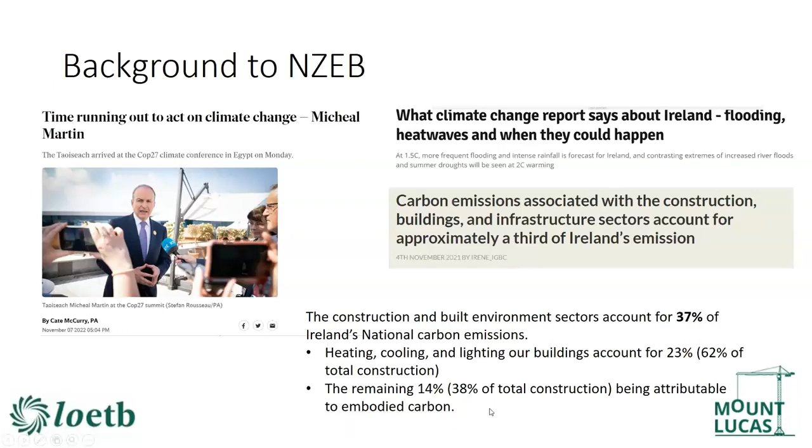If we look at that in statistics, the construction and built environment sectors account for 37% of Ireland's national carbon emissions. And that conversation is happening across the board. How are we reducing carbon emissions in our transport sector, in our agricultural sector? But we also need to look at the built environment sector as well. If we break that down even further, our heating, cooling and lighting in our buildings account for approximately 23% of that. And then the remaining 14% is embodied carbon. That conversation is starting to become more prevalent now, and you'll hear more about that in the future.

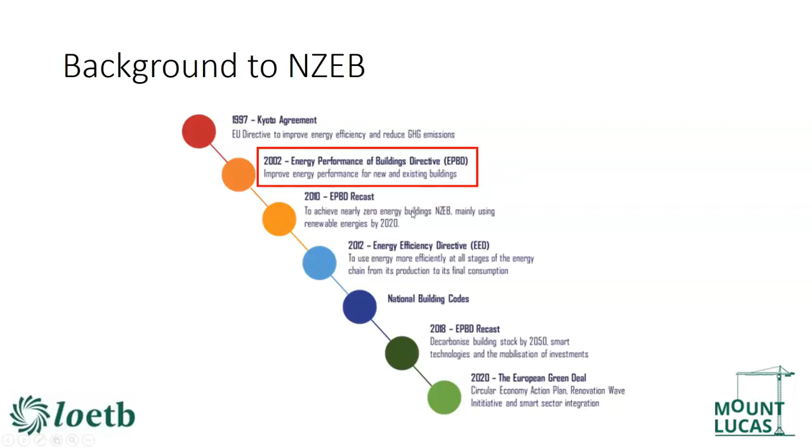So where did NZEB come from, or what's the background on it? Essentially, it's all coming from the Energy Performance of Buildings Directive, which is a European directive originally published in 2002. It was recast in 2010, and then recast again in 2018. Essentially, we're hoping to reduce our CO2 emissions by 51% by 2030. Like I've already said, we need to focus on the built environment. We need to aim to reach carbon neutrality by 2050 in order to slow down or stop climate change. We're all very aware that we're experiencing these incredible weather conditions at the minute.

I was helping my brothers build a shed at the weekend, and I went equipped for November farming, 2 pairs of trousers, 2 hoodies, and I was peeled down to my t-shirt in a matter of minutes because it was so warm, 17 degrees on a Saturday in November.

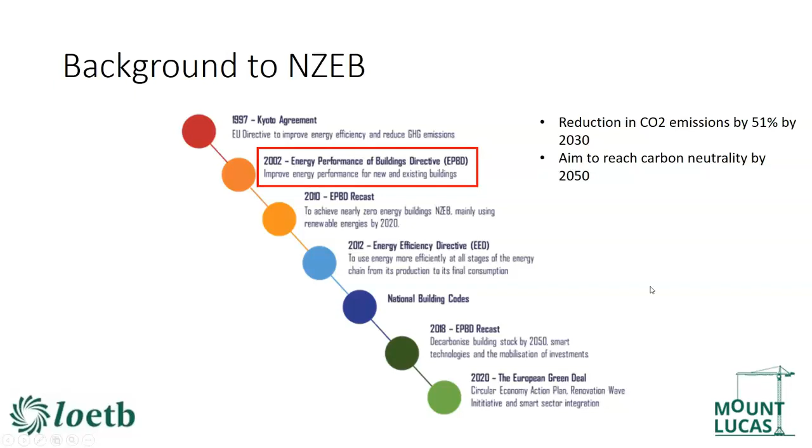We're all very worried about what's happening with regards to climate. So essentially, we now need to take more responsibility to slow down or stop climate change. We're focusing on the transport sector and the agriculture sector; we also need to focus on the construction sector. So the Energy Performance of Buildings Directive is a European legislation. It was pushed out to all of the individual member states, and NZEB started being mentioned in the 2010 recast. Each member state was given its own ownership on NZEB, and Ireland published these 2 documents in 2019.

So Part L, Technical Guidance Document L, and Technical Guidance Document F were both published hand in hand in 2019, and this is essentially where NZEB comes from. So it's the conservation of fuel and energy in dwellings. And in tandem with that, we need to have an understanding of the ventilation regulations. As I said, they were both originally published in 2019. TGD L has since been revised in 2022. Both documents must be looked at together in order to meet NZEB compliance.

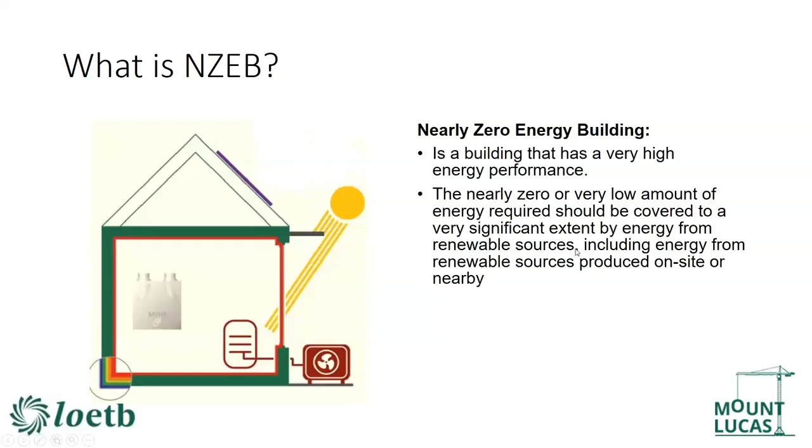So what is actually NZEB, and what does that mean for us? We have this schematic here at Mount Lucas. It's considered to be the 7 steps to NZEB, and I'm going to use that as my basis for this lesson today. A nearly zero energy building is a building that has a very high energy performance. The nearly zero or very low amount of energy required should be covered to a very significant extent by energy from renewable sources, including energy from renewable sources produced on site or nearby. And that's coming from the EPBD.

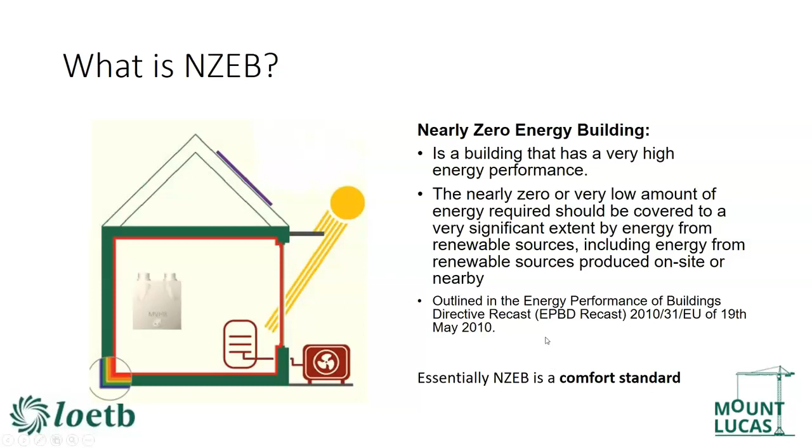Essentially, it's a comfort standard. So we're trying to build a highly insulated, highly airtight, well-ventilated home that costs very little to run and burns very little carbon. And then we're going to also produce renewable energies on site or nearby. That's what NZEB is in a nutshell. But ideally, we're going to have high levels of comfort in an NZEB dwelling.

So the three key targets for NZEB in an Irish context are to reduce the energy performance. And when we're doing that, we're comparing it to the existing housing stock. Most of us live in C-rated homes, D-rated homes, E-rated homes, or even Gs. And we measure those homes using the BER assessment tool or the DEAP software. So we want to reduce our energy performance coefficient, that EPC figure, and our NZEB dwellings should have an EPC of 0.3. That's when compared to the 2005 building regulations.

We also want to reduce our carbon consumption dramatically. So our carbon performance coefficient, or our CPC value, should be at 0.35. So we're going to consume less electricity, we're going to reduce our carbon consumption, and then finally we're going to have renewable energies in our houses. So we must have a renewable energy ratio, or an RER, of 20% on all NZEB dwellings in order to comply with NZEB. And that's coming straight from Part L of the building regulations. You'll find EPC, CPC, and RER littered throughout that document.

I just took some snapshots there of the BER in case you weren't familiar with the rating system. So it rates houses from A to G. And like I said, it's measured using the BER software, which is called DEAP, the Dwelling Energy Assessment Procedure.

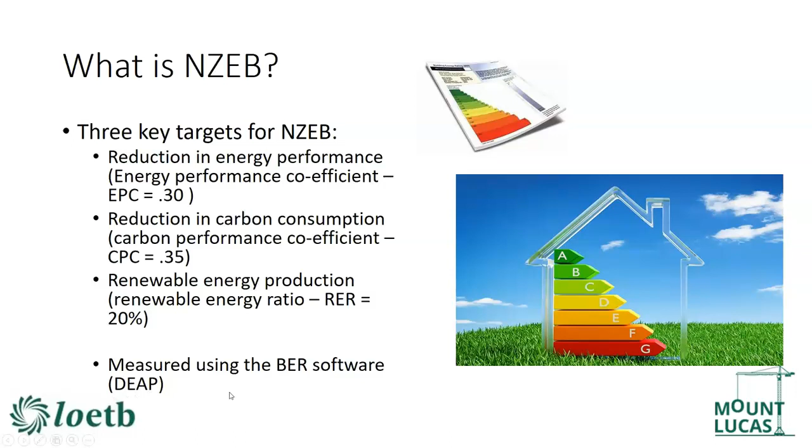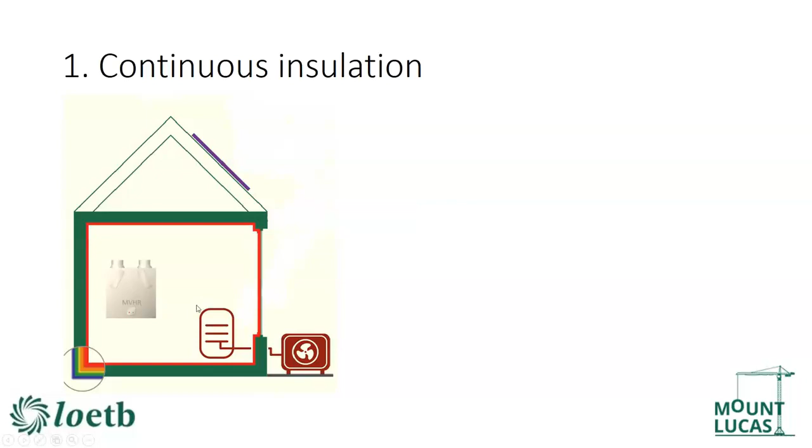So I guess the first measure that we must take in order to reduce the energy consumption in our dwellings is continuous insulation principle. So here I have my house. I have continuous insulation the whole way around my house. I'm going to have less energy escaping through that house. If we look at the second law of thermodynamics, one of those laws states that heat will always move from hot to cold. So what does that mean for us in a dwelling context?

Well, if I've heated my house up to 19 degrees internal temperature, and it's 4 degrees outside, for example, a normal November day, that thermal energy that's inside in my house is trying to escape however it can. Now, thermal energy will move in three ways: through convection, conduction, or radiation. But essentially, it'll escape through one of those three measures out of my house. So I'll have heat escaping through my walls, through my floor, through my ceilings, through my roof, through my windows, however it can, through conduction, convection, or radiation.

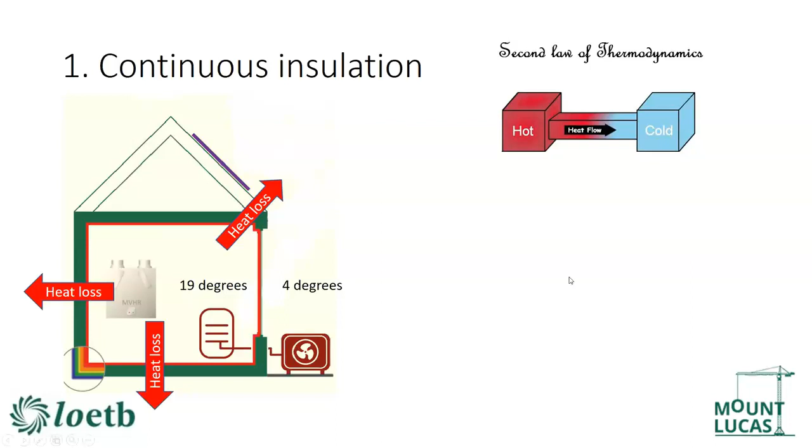So with my NZEB dwellings, and again, taken straight from Technical Guidance Document L, there are backstop U values that we must achieve in an NZEB dwelling. So you can see there the backstop U values for your roofs, for your walls, for your floors, etc. So 0.18 here, 0.18, 0.16. So we're trying to get our continuous insulation principle.

Interestingly, the average U value for our windows is 1.4. So that would be a standard double glazed unit, average U value at 1.4. But our windows form part of our insulation layer. We're talking about continuous insulation principle. We have 0.18s, 0.16s, 0.18s, maybe 0.2, depending on the house type, if it's flat roof detail. And then we have 1.4 here. So almost 10 times worse than your insulation in your attic, in your floor, etc. But that's one of the first ways that we're going to double down on heat loss in our NZEB dwellings.

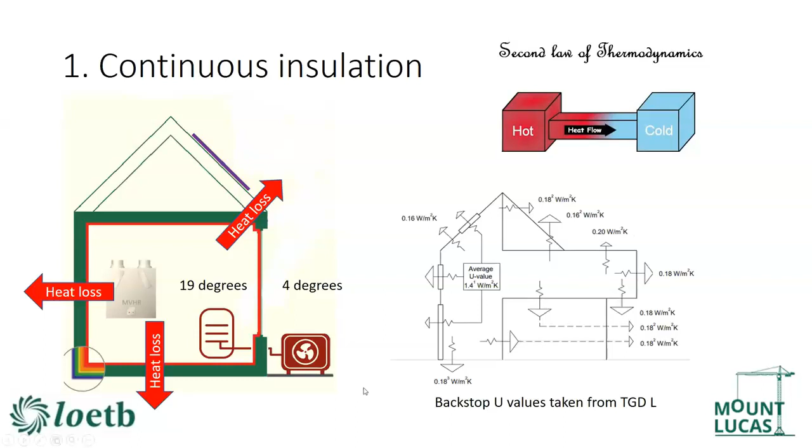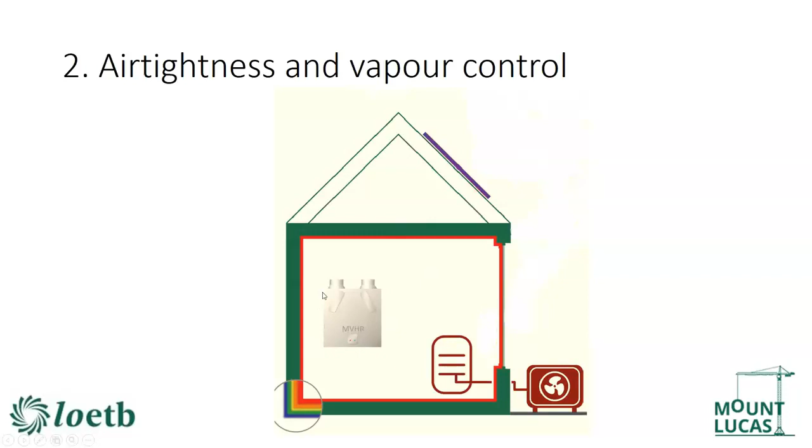The second way that we're going to double down is through air tightness and vapor control measures. So by insulating everywhere, we're going to stop heat loss through conduction, but we still will have heat loss through convection, so drafts. And remember, we're talking about NZEB as a comfort standard. So we want to minimize drafts where possible. So by implementing air tightness and vapor control measures in your house, and that's my red line here, I now have a continuous airtight vapor control layer around my home. And again, taken from Technical Guidance Document L, each NZEB home must have an air permeability level of below 5 meters cubed per hour per meter squared.

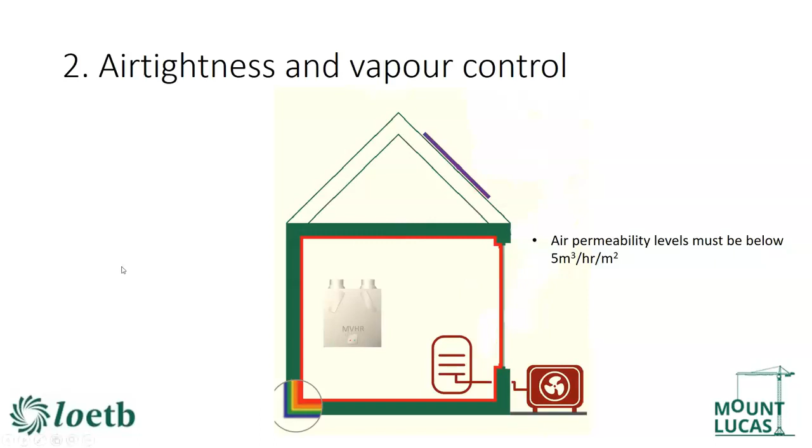So how do I achieve that? Well, there's loads of different ways of achieving air tightness, but the most common way in most homes now would be by installing tapes and membranes around your windows, at your floor to wall junction, at your wall to ceiling junction, and at various intervals. You can see two of these pictures here. Some of you might ask, how do you measure your air permeability? Air permeability is measured with the blower door test. And a change in Technical Guidance Document L since 2019, every new home needs to have a blower door test to determine air permeability measures.

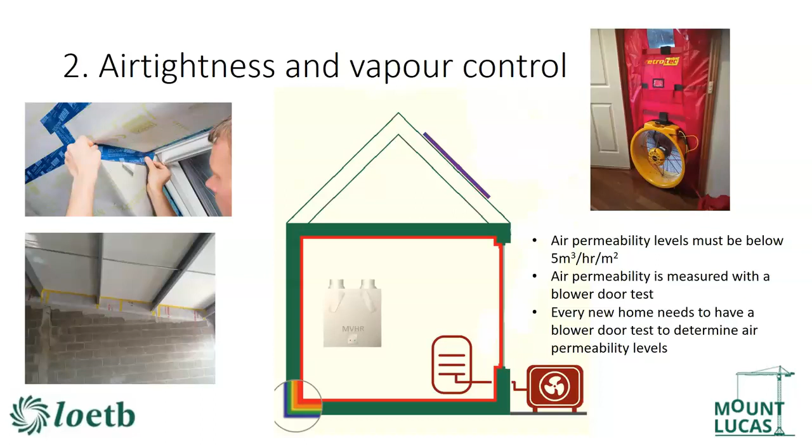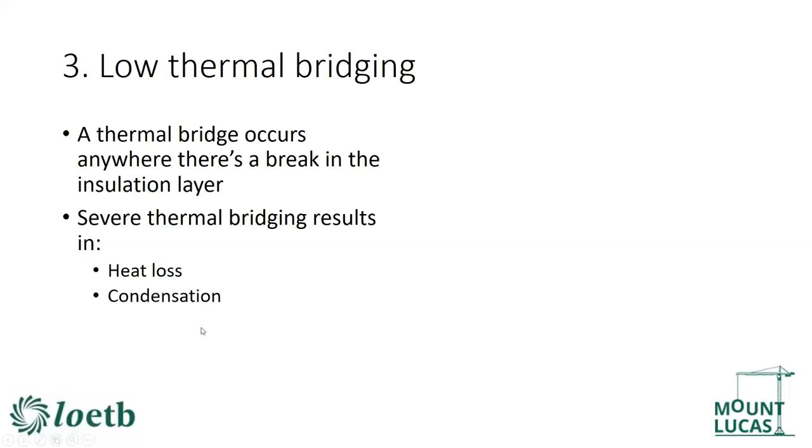So moving on then to the next principle of NZEB, low thermal bridging. And just a note, a thermal bridge occurs anywhere that there's a break in the insulation layer. So if I have severe thermal bridging, I'm going to have heat loss through conduction. I'll also have condensation and I'll have mold. But more worryingly, I'm going to have damage to the building fabric as that warm vapor-laden air escapes to the outside. We don't really want that happening in our NZEB dwellings.

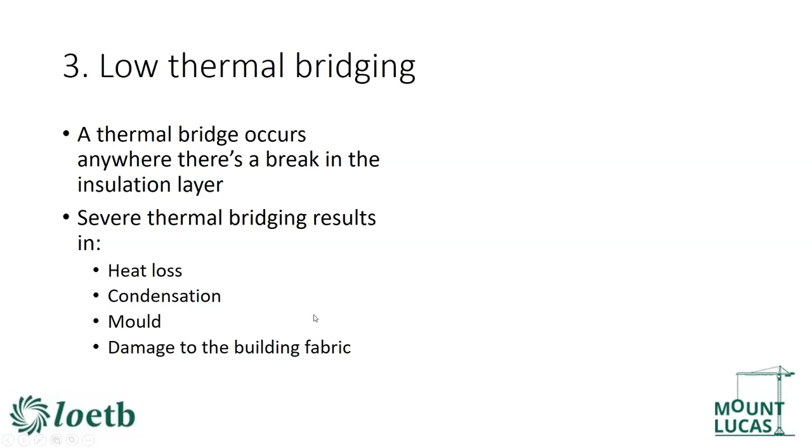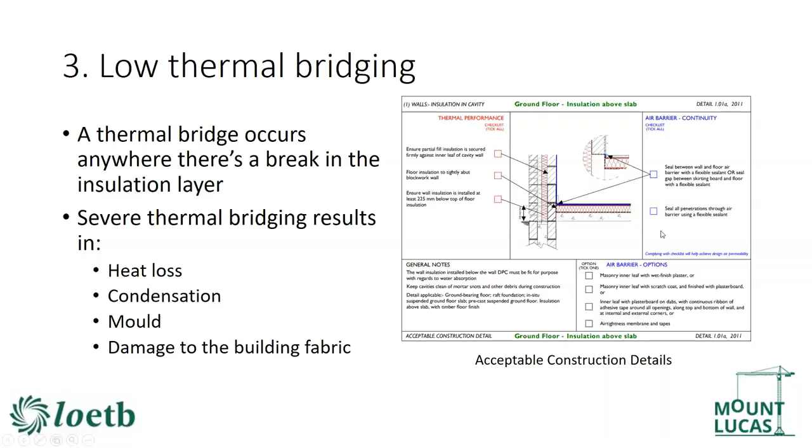So just to draw your attention to the fact that those acceptable construction details exist, they're free to download. If you just look up technical guidance documents or acceptable construction details, you'll find this whole suite of construction details. So this is your ground floor insulation above the slab, and there will be measures in there to try and minimize thermal bridges and also to ensure that you have a continuous air barrier.

We need to have high performing windows because, like I said already, we know that the windows are going to be the outlier. My walls have a U value of 0.18. My windows, standard double glazing, maybe have a value of 1.4. So your windows do form part of that insulation layer, and you must aim to achieve the lowest U values that you can.

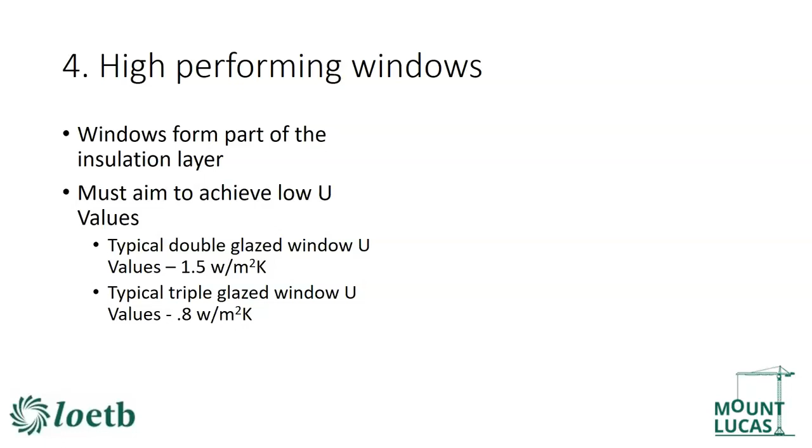Typical double glazed window U values, you're looking at 1.4, 1.5 watts per meter squared Kelvin. Typical triple glazed windows U values, you could be looking at 0.7, you could be looking at 0.6 here, but 0.8 would be maybe your standard if you were talking about an average value. So when we're talking about triple glazing versus double glazing, it is just worth considering. Now there are double glazing windows and there are exceptions that are going to have lower U values than 1.5, please don't get me wrong.

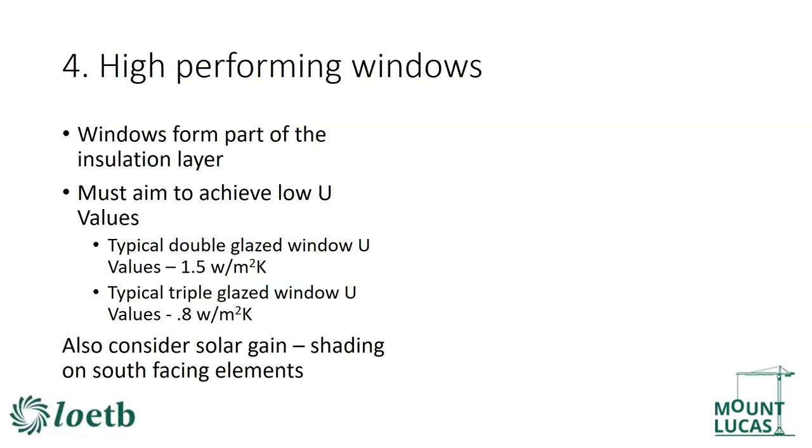But what you're aiming for with windows is there's going to be a combined U value and it's going to have the lowest U value possible, bearing in mind that your wall U value is at 0.18 as a backstop, as a minimum. And then we also have to consider solar gain. So if I have large windows on the south facing wall of my house, how am I going to prevent overheating in the summertime? So it is just worth considering.

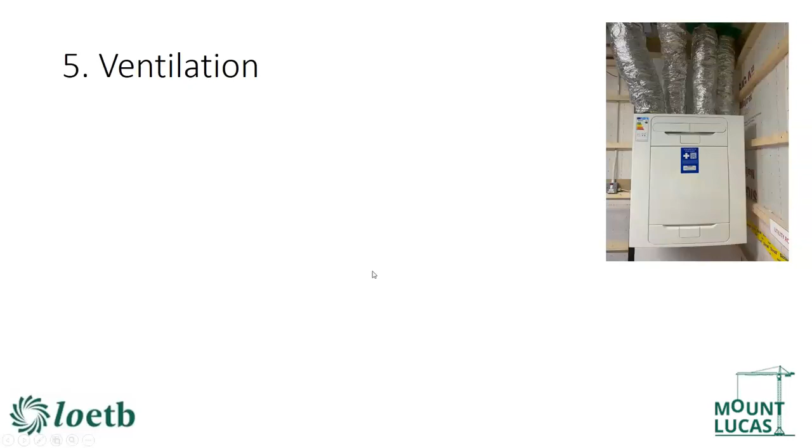Then ventilation is the next measure that we need to consider with NZEB. And there are two ventilation strategies outlined in Technical Guidance Document F. Technical Guidance Document F is the ventilation document that goes hand in hand with Technical Guidance Document L. This is a photo of one of the ventilation units here in the training centre, so your mechanical ventilation with heat recovery system. So the two strategies that were outlined are natural ventilation and mechanical ventilation.

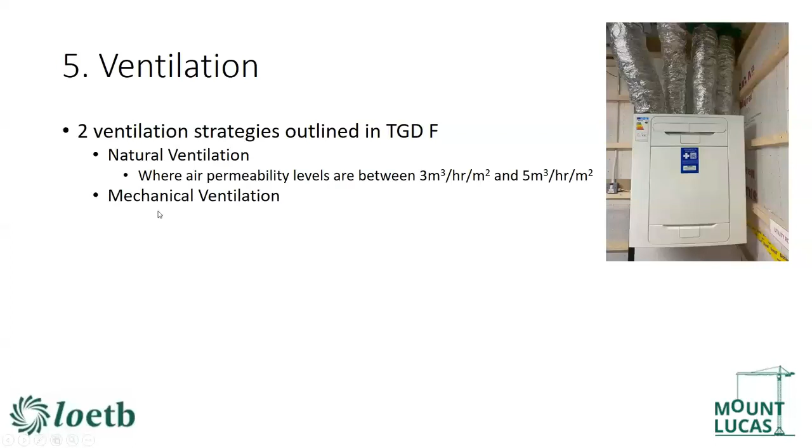Now, how do I decide what ventilation system to install? Well, it depends on your air permeability value. If your air permeability levels are between 3 meters cubed per hour per meter squared and 5 meters cubed per hour per meter squared, you can install natural ventilation. Now remember, 5 is the backstop. That's the absolute maximum that you can have in an NZEB dwelling. Where air permeability levels are less than 3 meters cubed per hour per meter squared, you must install a mechanical ventilation system in your house.

Why do you have to do that? Well, because you're building a highly insulated, highly airtight home, we must ensure that you're appropriately ventilating that space. We have one of the highest rates of childhood asthma in Europe. We know that we have poor indoor air quality in premises and homes in Ireland. So there's now a drive on to make sure that those homes and those spaces are adequately ventilated. And technical guidance document F has the calculation methodology to ensure that every house is calculated appropriately.

So what types of ventilation systems can I use for mechanical ventilation? So you could have mechanical ventilation with heat recovery, MVHR. You could have a continuous mechanical extract ventilation system, CMEV, demand control ventilation system, DCV, or you could have decentralized versions of these. It doesn't really matter. As long as it's mechanical ventilation, you're ensuring that there are delivered airflow rates and delivered extract rates into those rooms. Every NZEB dwelling must ensure that appropriate calculated ventilation levels are being delivered.

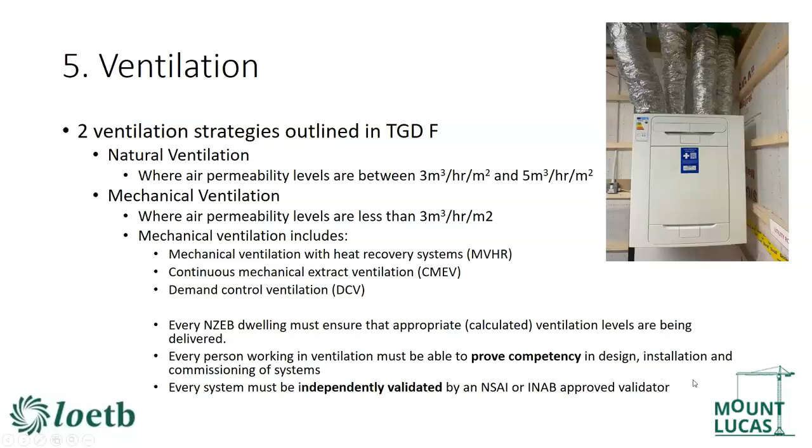So then we're moving on to high efficiency heating and domestic hot water. And this is where your heat pumps come into play. So we had those backstop values for NZEB earlier, your energy performance coefficient, your carbon performance coefficient, and your renewable energy ratio. So your CPC was 0.35. We're trying to reduce our carbon consumption to hit those 2030 targets and 2050 targets. So we need to reduce our reliance on fossil fuels in order to reduce carbon emissions.

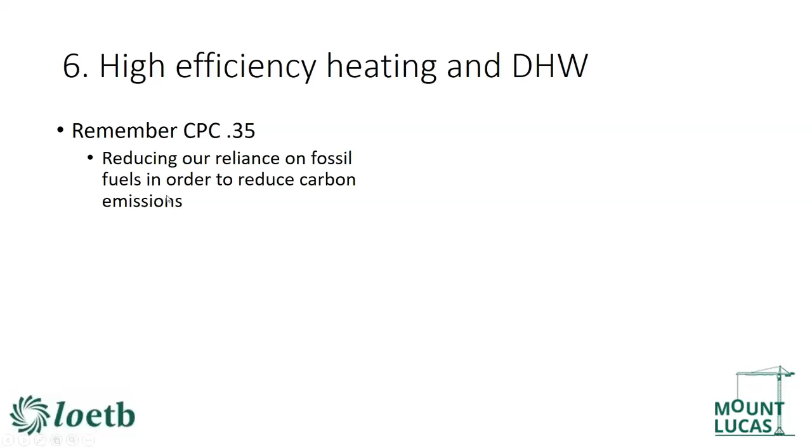I live in the Midlands. My parents have a two-story house in the countryside. There are 3 stoves slash ranges in that house, and all of them burn turf and timber. So, you know, in terms of carbon emissions, they'd be quite large coming out of that house. We need to look at reducing our reliance on fossil fuels in order to hit this CPC value.

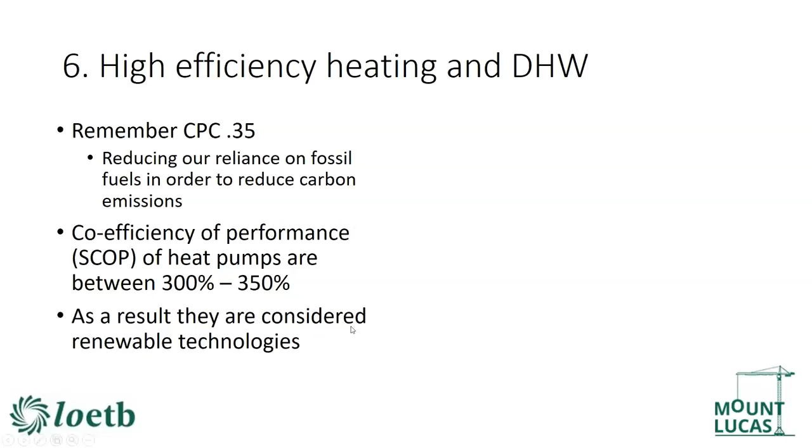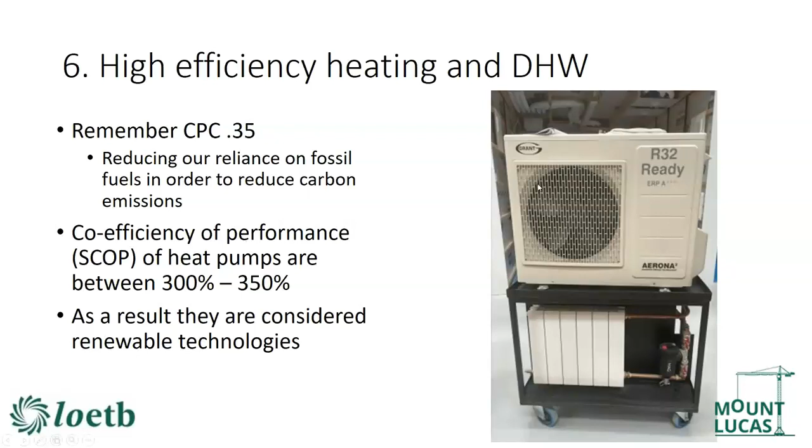So because of that, they're actually considered renewable technologies. And you could be talking about a ground source heat pump, an air source heat pump, it doesn't matter. But heat pumps are becoming more popular because of the fact that they're so efficient, and they're positively impacting on your BER assessment.

Then the final step for NZEB is the renewable energy ratio. So like I said earlier, it's 20%. 20% of regulated load must be produced on site or nearby. That's again coming from Technical Guidance Document L. So your regulated load includes your heating, your cooling, your ventilation, your lighting, and your domestic hot water. It doesn't include appliances, folks.

And that's, I guess, because we can't standardize the amount of appliances in any one person's home. But every house we know needs to be heated. Houses in the future will need to be cooled. Houses have some sort of a ventilation loading on them. They also need to be lit, and your hot water needs to have electricity as well. So all of these will have a loading, and they do have an impact when it comes to your assessment, your BER. So 20% of that regulated load now must be produced on site or nearby.

And there are different ways that you can meet that trigger in terms of your NZEB dwelling. You could use PV panels on the roof. You could have micro generators, so for example, micro turbines, or even a wood pellet stove could potentially go towards that 20% if you were partnering it up with something else. So there are different ways that you could hit that 20% regulated load.

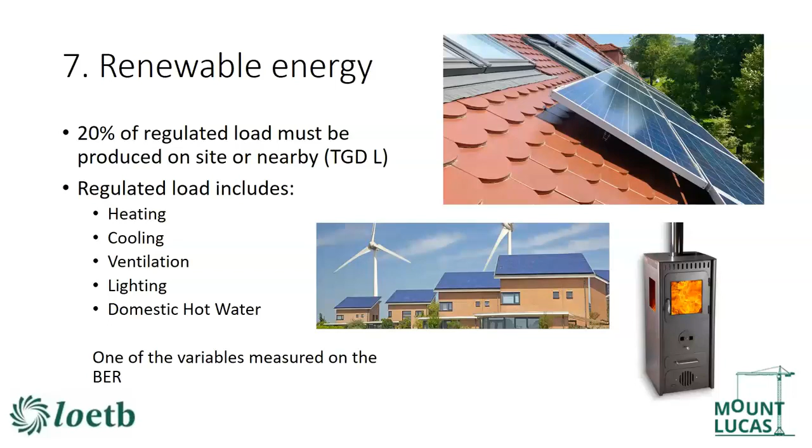But most people, in order to hit NZEB compliance, are partnering a heat pump with solar PV, and they're hitting that 20% very, very easily. Because you can now feed back into the grid with your solar PV systems, and you can get paid for the production of excess electricity as well, it's looking more and more appealing to homeowners. So it is one of the variables that's measured on the BER. Like I said, we're looking at the EPC, the CPC, and the RER in terms of the BER assessment.